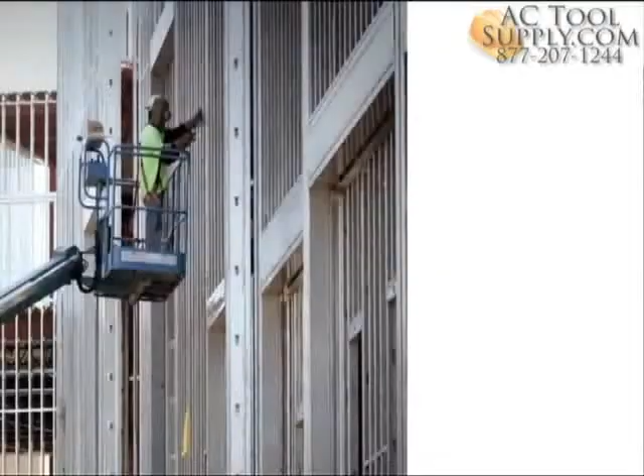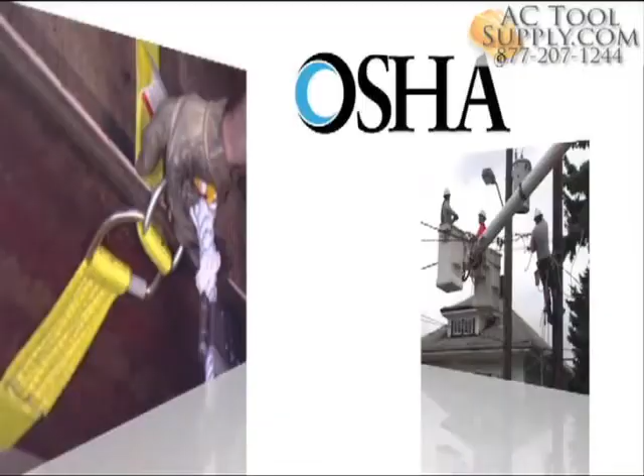Ensuring a safe workplace is a mandated employer responsibility. Under provisions of the Occupational Safety and Health Act, employers must provide workers with an environment free from safety and health hazards. In turn, manufacturing standards for fall protection equipment are established by the American National Standards Institute and the Canadian Standards Association and form the basis for OSHA safety regulations.

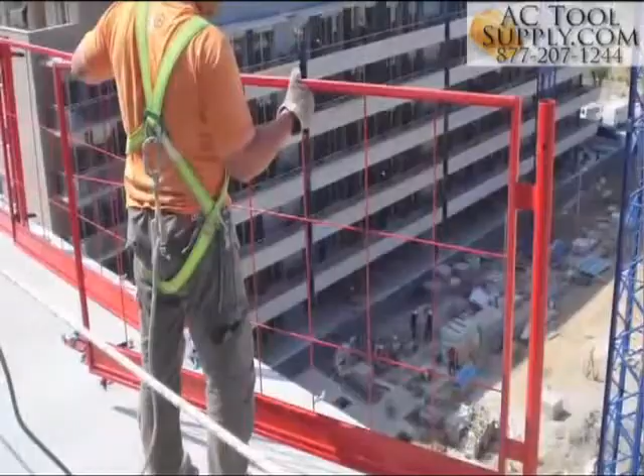Apart from compliance issues, however, the most effective fall protection programs result when employers work closely with workers to identify fall hazards present at a particular site and develop comprehensive safety at height plans and procedures. Even when fall protection measures are in place, it is important to recognize that equipment deteriorates over time, that routine inspection for wear and damage is critical, and that proper training in fall protection and equipment selection are absolutely vital.

A written fall protection safety plan should be created once the specific fall hazards have been identified. The plan should specify what fall prevention or personal protection measures are to be used, and it should also identify who is responsible for implementing the safety measures, including supervision and training. The program needs to be clearly conveyed and understood by all participants.

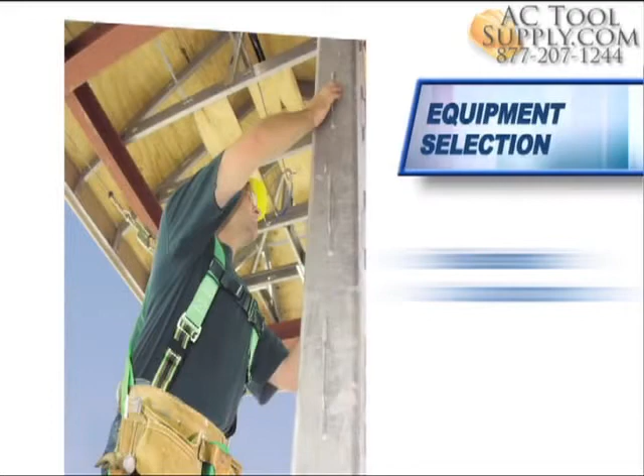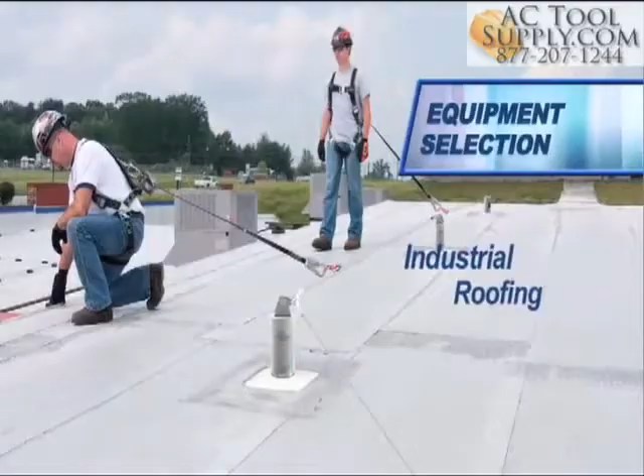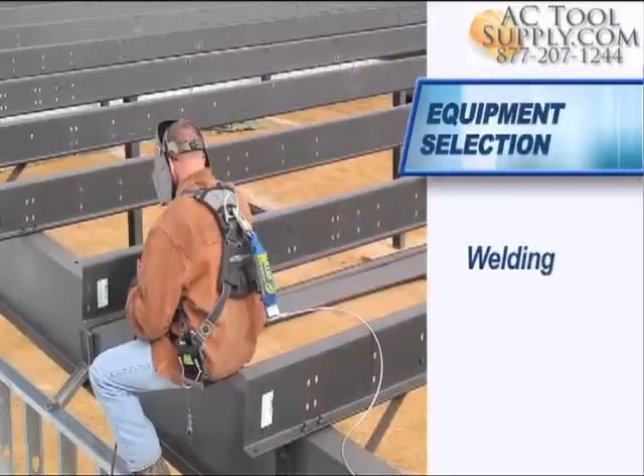Employers should be familiar with the different fall prevention equipment options available and select based on the particular site and type of work being performed. Consultation with safety equipment manufacturers is invaluable in identifying equipment that meets specific worker and job site variables. Because all work environments differ, it is impossible for the manufacturer to determine exactly which safety at height products will provide maximum protection for each job. By understanding how fall prevention and protection equipment operates and knowing the differences in product functions, the employer can select equipment that is best suited for its workers.

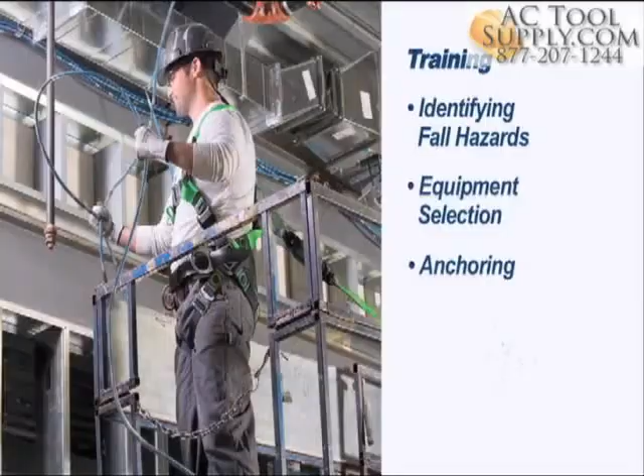Every worker must be trained in the proper use of appropriate fall prevention or personal protection equipment. Training should include identifying fall hazards, selecting appropriate equipment, following proper anchoring procedures, and using equipment properly. Workers should also learn how to inspect and maintain equipment.

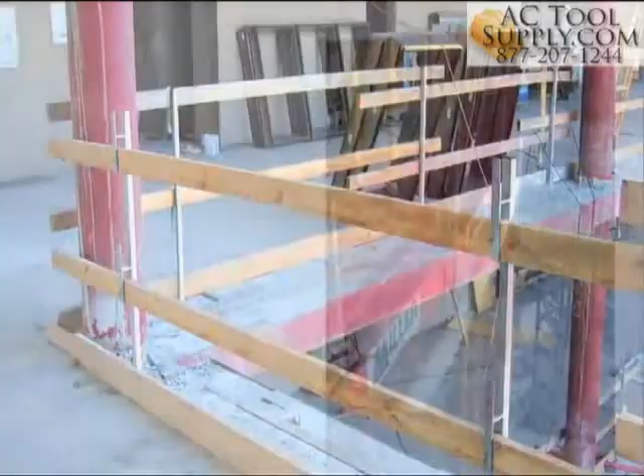Fall prevention, fall arrest, positioning and restraint, suspension and retrieval are the basic categories encompassing types of fall protection equipment. Fall prevention measures entail the installation of permanent or temporary barrier or guardrail systems that simultaneously protect multiple workers. This category of collective systems is typically used in building construction and other elevated areas where workers are exposed to leading edge decks, unprotected roof edges, elevator shafts, floor hatchways, chutes, or wall openings.

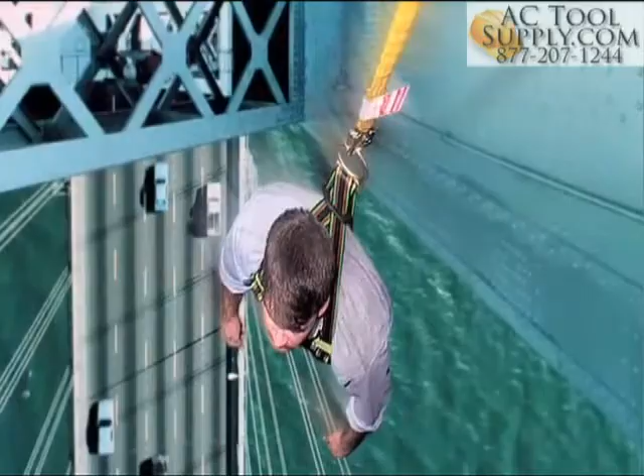Fall arrest equipment, or personal fall arrest systems, is comprised of three components that are often referred to as the ABCs of fall protection. These are anchorage connector, body wear, and connecting device. Used properly, a fall arrest system does not prevent a fall, but rather suspends a worker in the event of a fall and prevents impact with a lower obstruction or the ground.

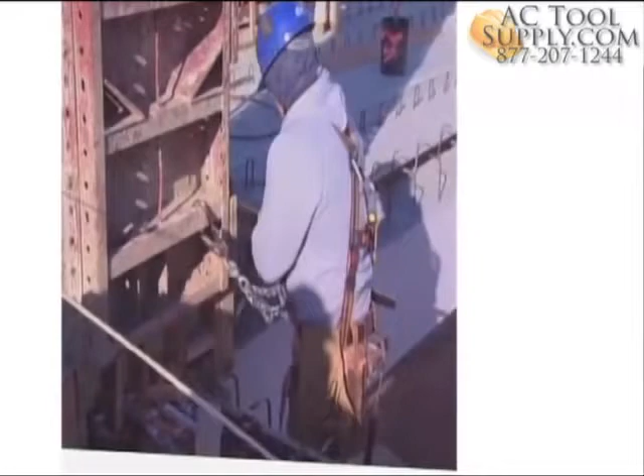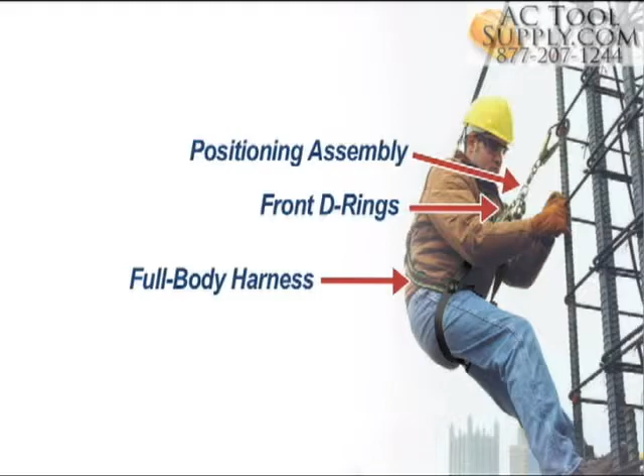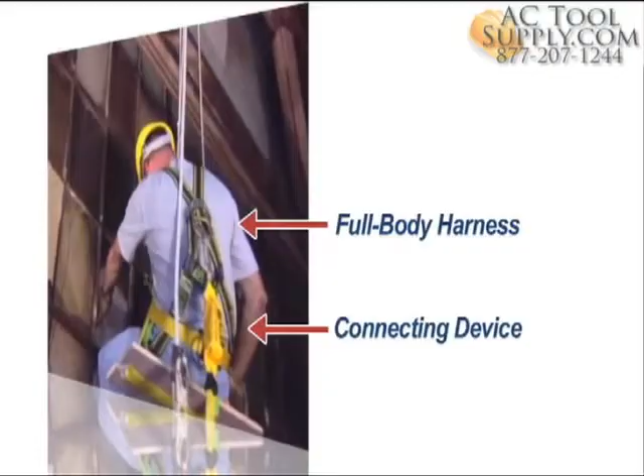Positioning and restraint systems hold a worker in place, allowing a hands-free workspace, or restrict a worker's movement in proximity to a fall hazard. A typical system consists of a full body harness with side or front D-rings, a positioning assembly, and an attachment point. Suspension systems enable workers to be lowered and supported to accomplish hands-free tasks such as building maintenance functions. Typical components include a full body harness, a connecting device or work line, a suspension device such as a chair or sling, and an attachment point.

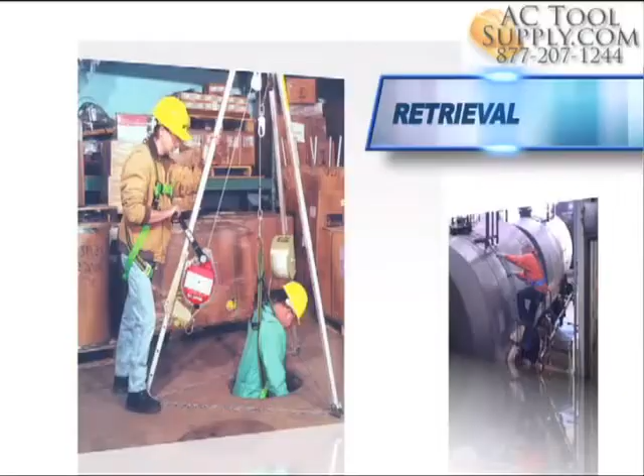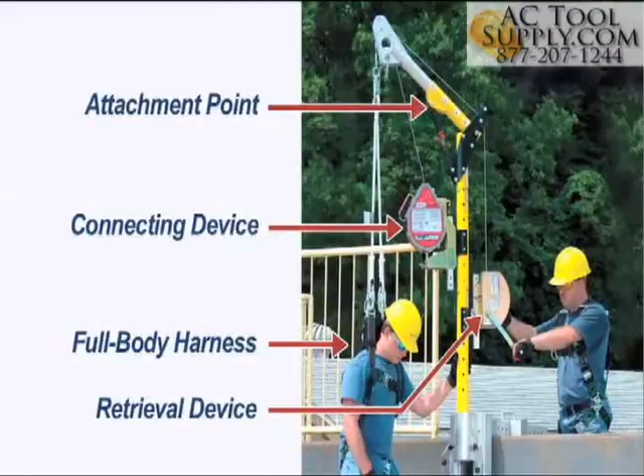Retrieval systems are used in storage tanks, manholes, and other confined space applications. The system includes a full body harness, a retrieval device, a connecting device, and an attachment point such as a tripod or Dura-hoist system. The three key components of the personal fall arrest system must be in place and properly used to provide maximum worker protection: anchorage connector, body wear, and connecting device.

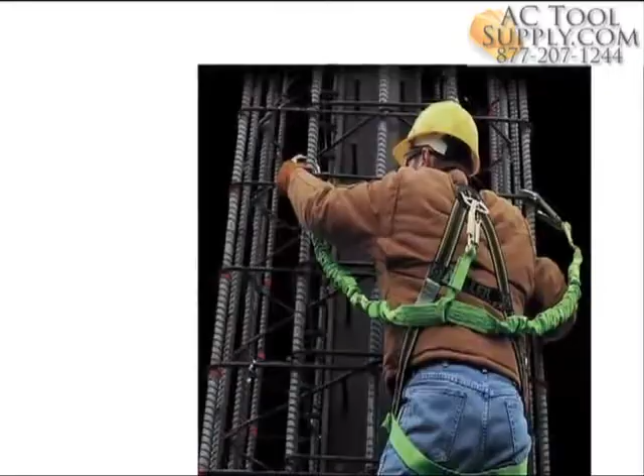An anchor point is a structural item such as an I-beam, scaffold, rebar, or lifeline to which workers are affixed when a fall hazard is present. It is sometimes referred to as a tie-off point. Anchor points must be carefully selected since their strength and stability are depended upon in case of a fall. To avoid a dangerous swing fall, workers should always try to connect and work directly underneath an anchorage point whenever possible.

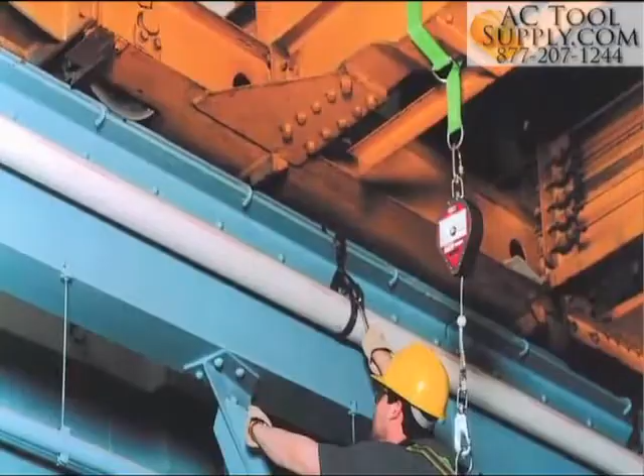An anchorage connector is an intermediary fall protection device, such as a cross-arm strap, D-bolt, or rope grab, that links the worker to the anchor point. Anchorage connectors are offered in a variety of configurations to accommodate vertical or horizontal connections for attachment to concrete substrates, large and small beams or scaffolding, rooftops, and structural steel. Some anchorage connectors are built into connecting devices. These tie-back anchorage connecting devices will be addressed in detail later.

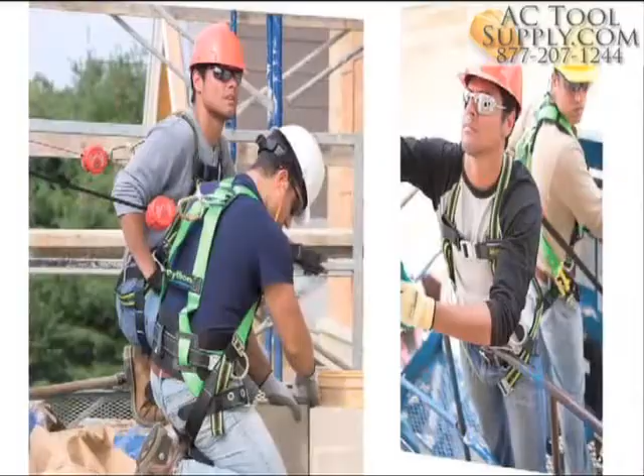The only form of body wear acceptable for fall arrest is the full body harness. The harness style should be selected based on the type of work being performed and the overall work environment. The full body harness offers an inherently high safety factor since fall forces are distributed throughout the body over many webbing components, including chest, shoulder, waist, and legs.

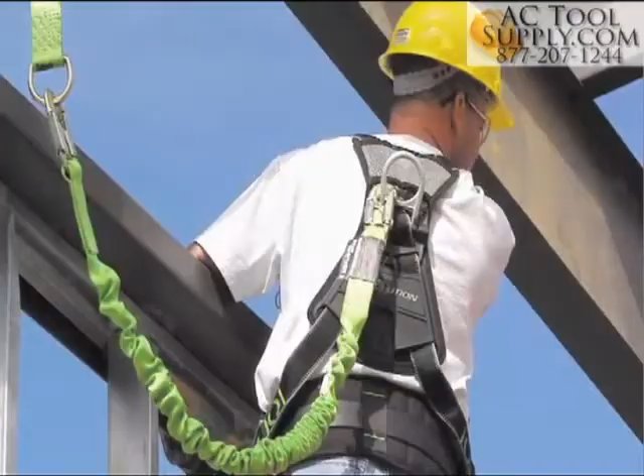In addition to distributing forces throughout the body, a properly fitted full body harness keeps the worker suspended upright while awaiting rescue. This is due to the sliding back D-ring, which slides along the webbing to the back of the neck once a fall occurs. OSHA states that potentially fatal suspension trauma can occur within minutes while waiting for rescue after a fall. Average fall rescue time is 15 minutes.

When used, the Miller Relief Step Safety Device provides support and enhances blood circulation until rescue, permitting the ability to move and flex leg muscles. Small and lightweight, the Relief Step Safety Device attaches to any brand of full body harness. Utilizing 2 Miller Relief Steps, one for each leg, assures greater comfort until rescue is completed.

While safety directors agree a comfortable harness fit is crucial to compliance, some workers lose sight of how important it is to follow directions when it comes to ensuring a snug fit with chest and leg strap adjustments and back D-ring positioning. In order to ensure proper protection, the full body harness must be worn properly. A simple 6-step guide can be followed that could save your life.

Hold the harness by the back D-ring and shake to allow any tangled straps to fall into place. Unbuckle chest, leg, and waist straps. If the harness has a belt, unbuckle it too. Slip the straps over the shoulders so the back D-ring is located in the middle of the back between the shoulder blades. Pull the end of one leg strap between the legs and secure to the opposite end. Repeat this step with the other leg.

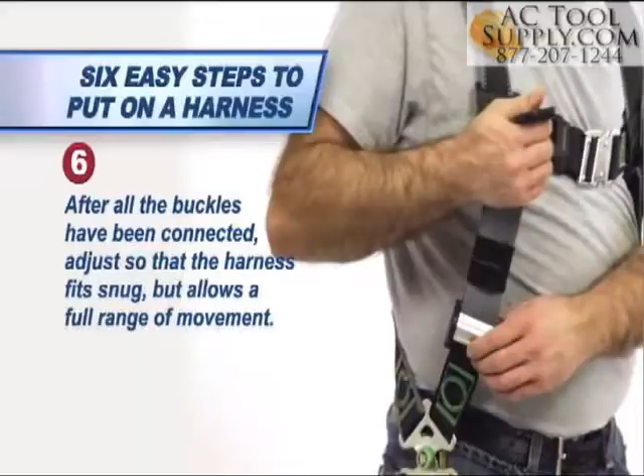If the harness has a belt, connect that after the leg straps. Connect the chest strap and position in the mid-chest area and then tighten shoulder straps. After all the buckles have been connected, adjust so that the harness fits snug but allows a full range of movement. Pass excess webbing under the loop keepers or web finials.

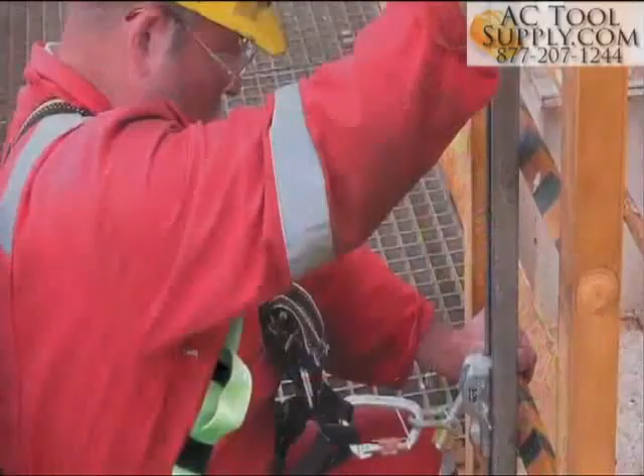Appropriate harness sizing influences compliance. Manufacturers offer various sizes as well as an array of styles for specific industries or activities. Side and front D-rings are typically used for positioning only. However, front D-rings or web loops can be used for ladder climbing and rescue.

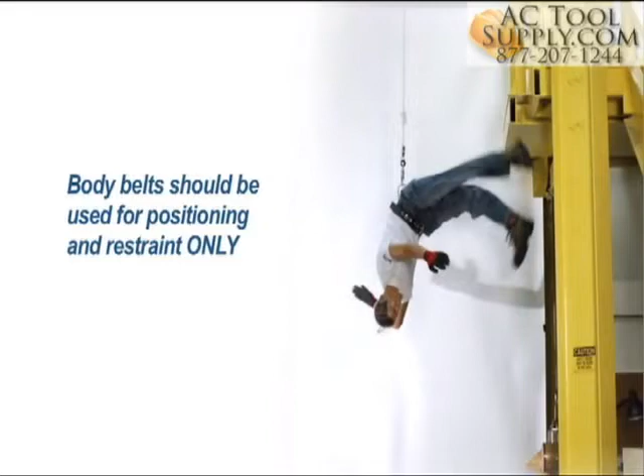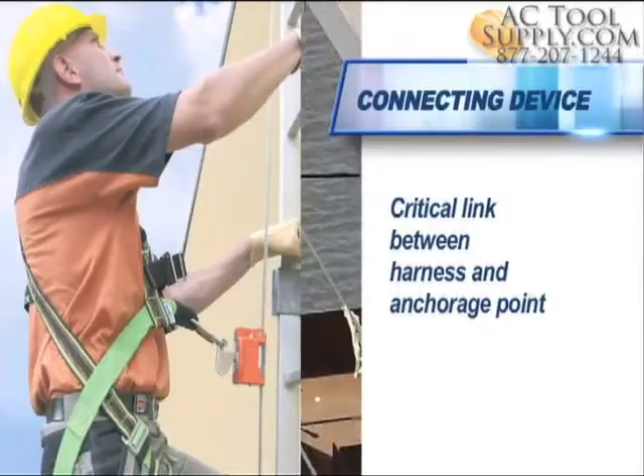Body belts should be used for positioning and restraint only. Most regulations prohibit their use for fall arrest. Body belts do not distribute fall forces, but concentrate arresting shock in the abdomen, resulting in serious internal injuries. A connecting device is the critical link between the harness and the anchorage point. The connecting device manages the greatest forces during a fall.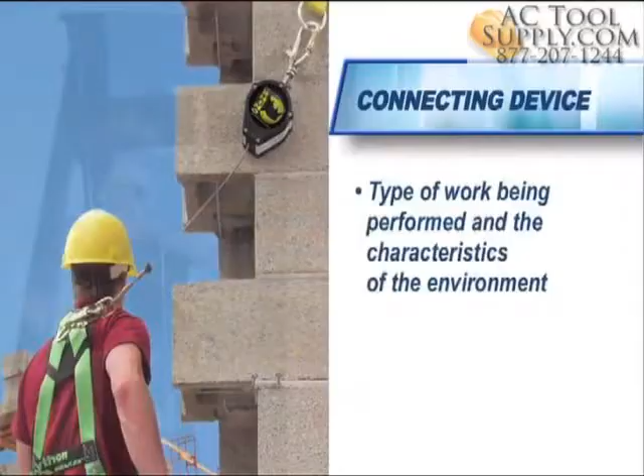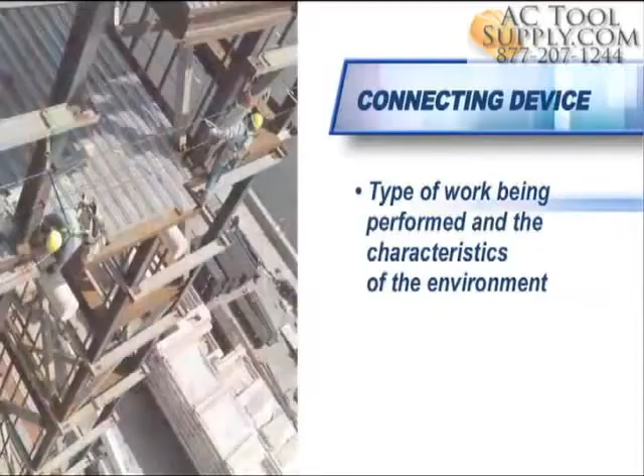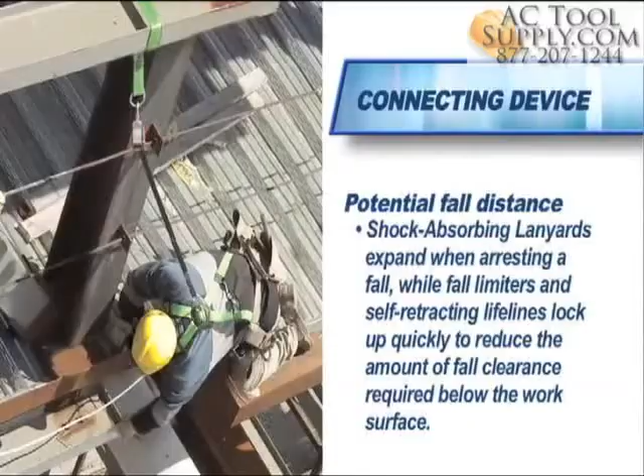Connecting devices should be selected according to these criteria: type of work being performed and the characteristics of the environment, such as the presence of moisture, dirt, oil, grease, and electric hazards, as well as the ambient temperature. Potential fall distance. Shock-absorbing lanyards expand when arresting a fall, while fall limiters and self-retracting lifelines lock up quickly to reduce the amount of fall clearance required below the work surface.

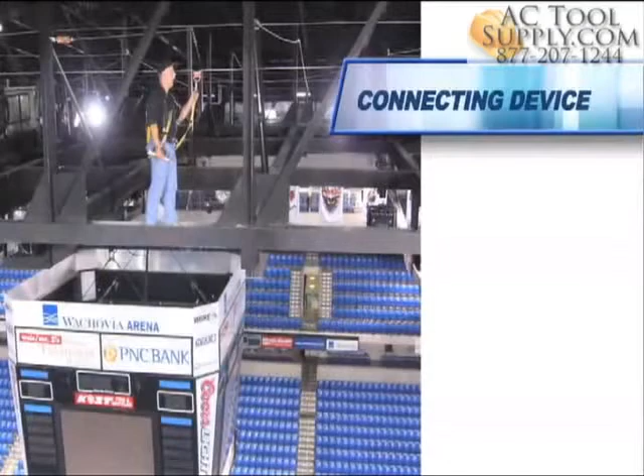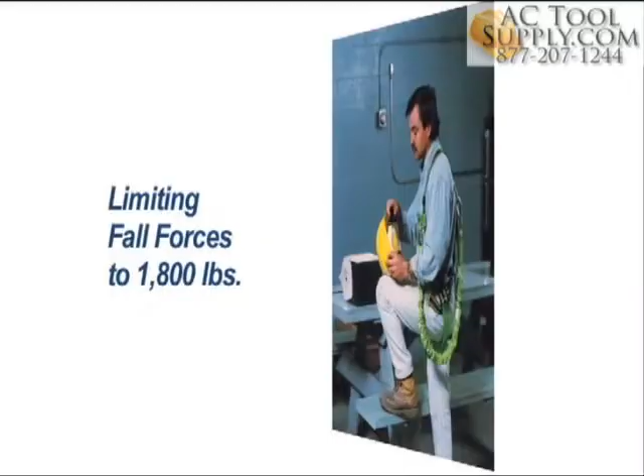A personal fall arrest system should be designed and tested as a complete system. Components produced by different manufacturers may not be interchangeable or compatible. Selection criteria should also include a close look at product quality. For example, OSHA regulations call for limiting fall forces on an individual wearing a full body harness to 1,800 pounds. Most reputable lanyard manufacturers state maximum arrest force on the label of the lanyard.

While OSHA regulations are the law and are enforced by a federal agency, ANSI standards are self-enforced by individual manufacturers. There is no enforcement body and no inspectors. The buyer cannot take stated performance per ANSI guidelines for granted. Always check with the manufacturer for documented proof. When attaching the connecting device to the harness, attach to the back D-ring only. If other D-rings are integrated on the harness, their use is for positioning or restraint.

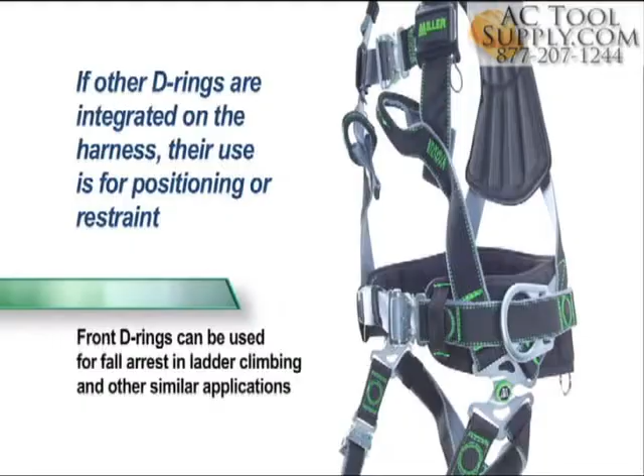Shock-absorbing lanyards are required for a fall arrest system. Non-shock absorbing lanyards are for positioning and restraint only. While both will arrest a fall, the maximum arresting forces when used together with a full body harness need to be less than 1,800 pounds. This is extremely difficult to achieve using a lanyard without a shock absorber.

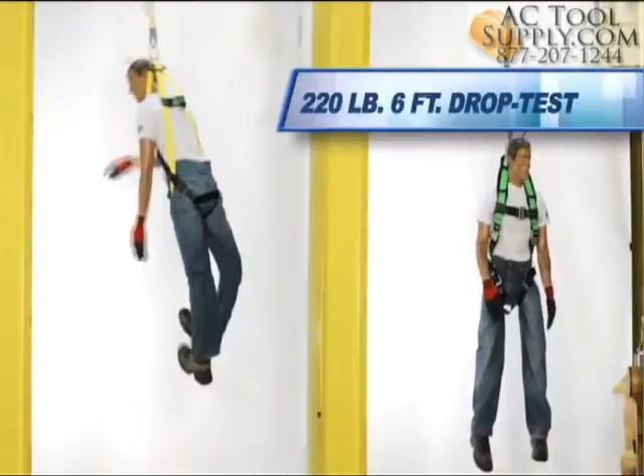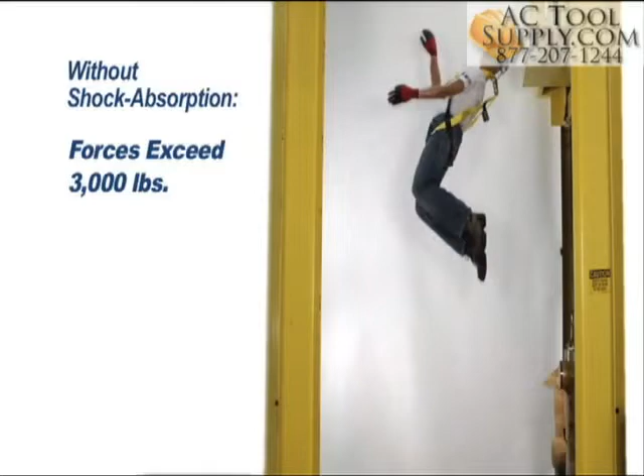A test fall of a 220-pound mannequin dropping 6 feet with and without a shock-absorbing lanyard demonstrates the forces on the body. Without shock absorption, forces exceed 3,000 pounds, causing the head to snap back and the body to bounce at the instant of arrest. With a shock-absorbing lanyard, deceleration is much smoother and more controlled, and fall forces are contained to 900 pounds.

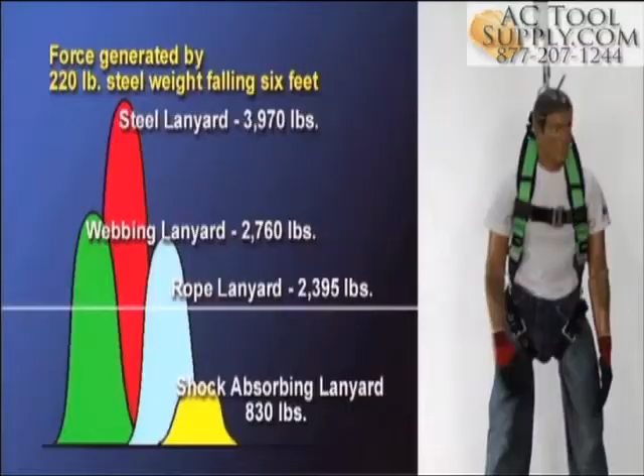Shock-absorbing lanyards feature pack or tubular designs, specially woven inner cores that smoothly expand to reduce fall arrest forces. Lanyards are available in steel, rope, and webbing. Never tie a knot in any web or rope lanyard. It reduces the strength by 50%.

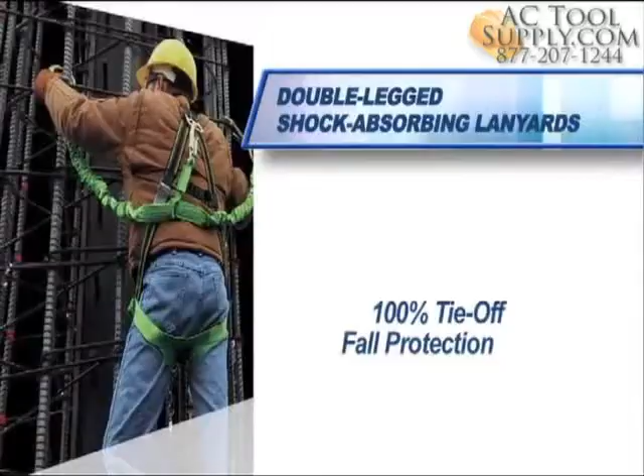Double-leg shock-absorbing lanyards provide 100% tie-off fall protection. If one leg is not used, it should be connected to a pull-free lanyard ring on the harness and never be attached to any permanent fixture on a harness such as a side D-ring. All Miller brand harnesses include pull-free lanyard rings, designed for storing a lanyard or extra lanyard leg when not in use.

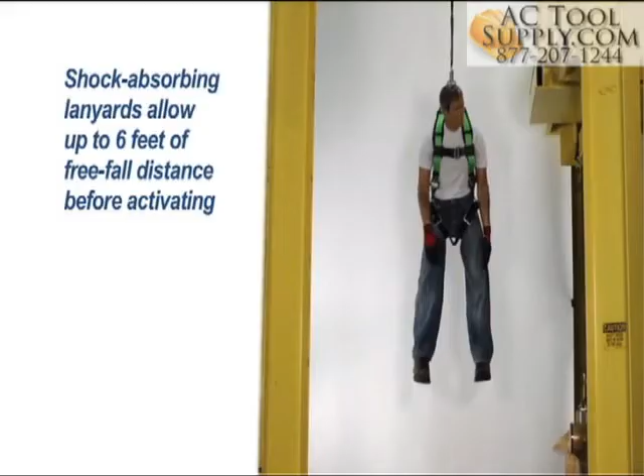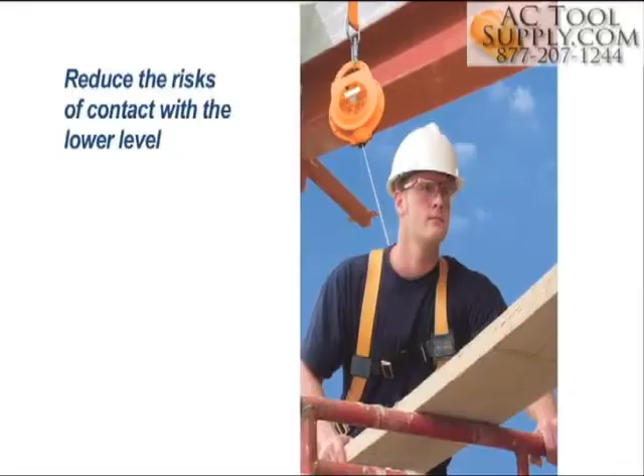Fall limiters and self-retracting lifelines, sometimes referred to as retractables, yo-yos, and seatbelts, are approved alternative connecting devices to shock-absorbing lanyards. While traditional shock-absorbing lanyards allow up to 6 feet of free fall distance before activating, self-retracting lifelines require less than 2 feet. Shorter activation and arrest distances reduce the risks of contact with the ground or lower level obstructions and allow for easier rescue in the event of a fall. Fall limiters and self-retracting lifelines are available with working lengths ranging from 6 to 175 feet.

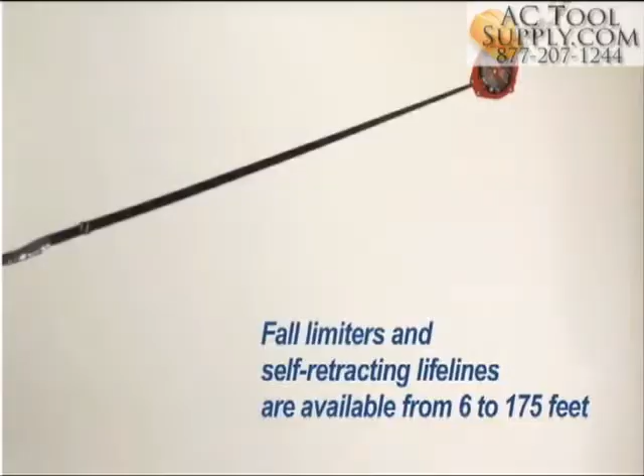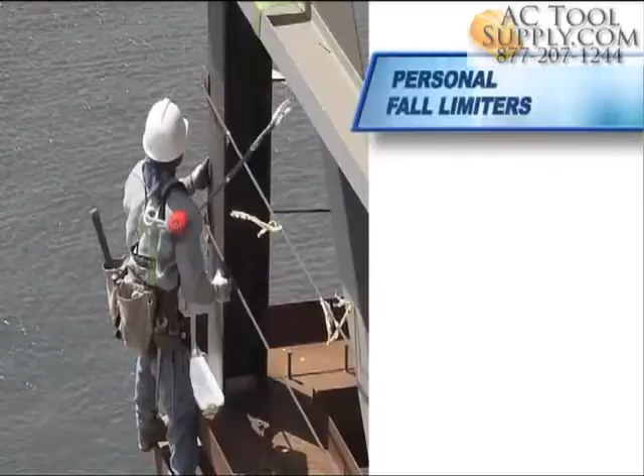Self-retracting lifelines are durable, heavy-duty devices that have webbing or cable wound on a brake drum that extends as the worker moves away from the anchor point and retracts as he nears the anchor point. Personal fall limiters are lightweight web connectors that require less fall clearance and offer optimal mobility while preventing tripping hazards. They may be attached directly to the back D-ring or used as a traditional retractable lifeline. Double leg units are also available for 100% tie-off fall protection.

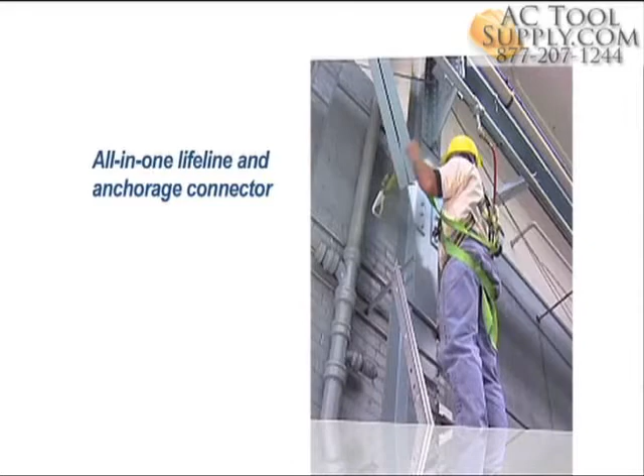Tie-back lanyards are a type of connecting device available as a lanyard or personal fall limiter that have a special snap hook and high-strength webbing that is designed to tie back anywhere along the lifeline. This all-in-one lifeline and anchorage connector increases safety and reduces equipment required on the job site. Only special snap hooks and webbing designed for use with tie-back lanyards are acceptable.

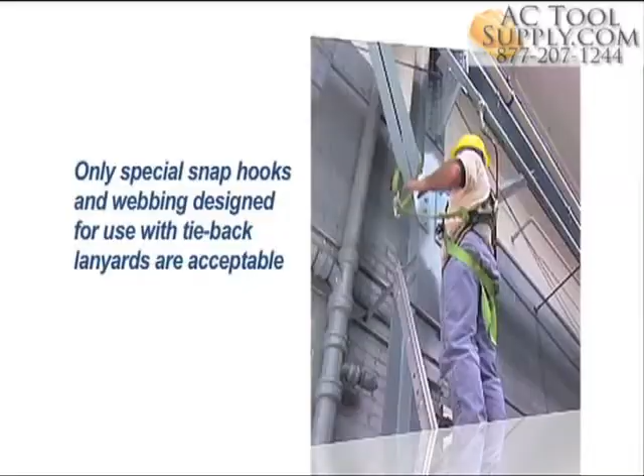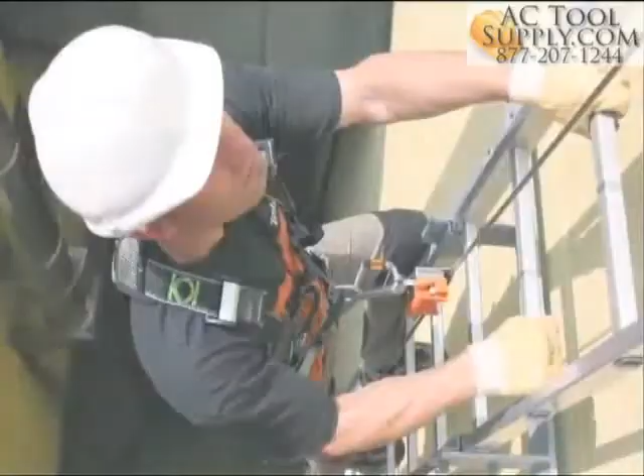Vertical lifelines are connecting devices available as rope or cable and used in conjunction with rope or cable grabs. These grabs are designed for hands-free operation, easily sliding up or down a lifeline as the worker moves, but instantly locking in place in the event of a fall. Common applications include roofing, window washing, and fixed ladder climbing. Connecting devices are the most critical components in surviving a fall and must be carefully chosen, properly used, and routinely inspected to ensure optimal performance and worker safety.

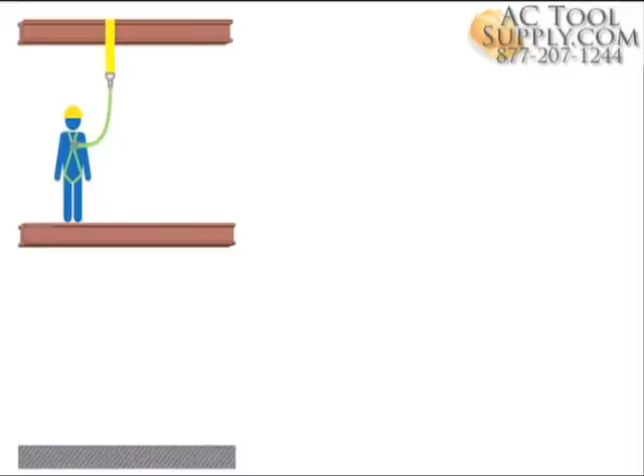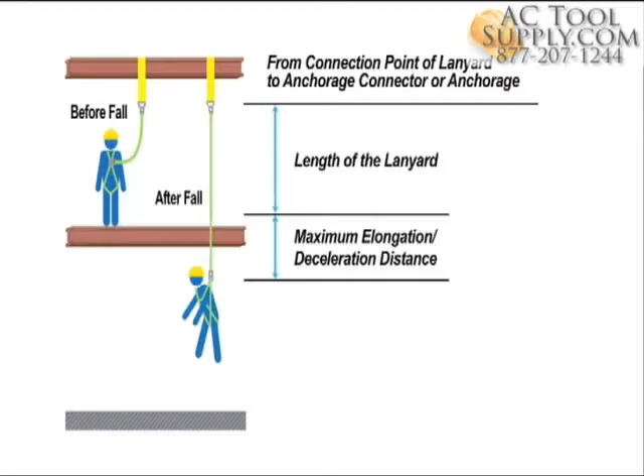Fall clearance calculations are vital in selecting proper anchorage points and connecting devices, and to avoid striking a lower level or obstruction in the event of a fall. Free fall distance should be limited to the shortest distance possible. This is never more than 6 feet when using a shock-absorbing lanyard, unless using equipment designed specifically for free falls over 6 feet. When calculating fall clearance required for a shock-absorbing lanyard, the following variables must be considered: the original length of the lanyard, the maximum elongation after shock absorber deployment, the height to the worker's back D-ring, and a safety factor of 3 feet.

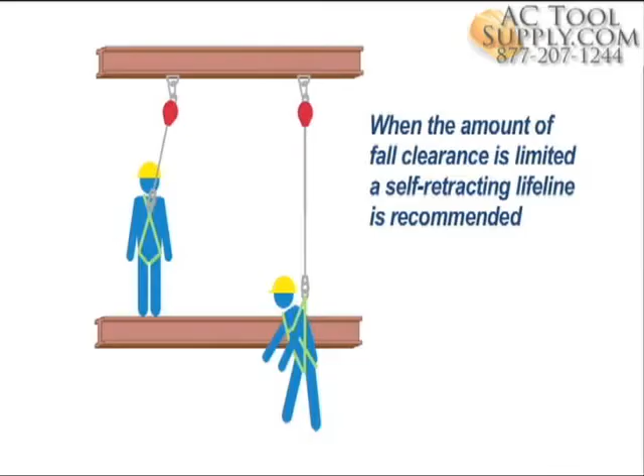When the amount of fall clearance is limited, a self-retracting lifeline is recommended. Some retractables require as little as 5 feet of fall clearance from the work surface to the next lower level or obstruction. While fall clearance is calculated from the anchorage point for a shock-absorbing lanyard, fall clearance for a self-retracting lifeline is often calculated from the work level. When calculating fall clearance for a self-retracting lifeline from the work level, the following must be considered: maximum fall arrest distance and a safety factor of 3 feet. Always know your fall clearance when selecting your connecting device.

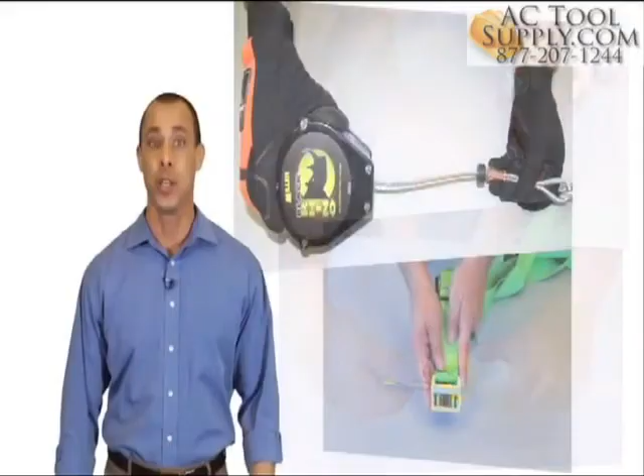To maintain service life and high performance, each harness and connecting device should be visually inspected before each use and regularly inspected by a competent person as defined by OSHA. Following these instructions may still necessitate removing the harness or connecting device from service prior to the expiration of the 5-year life expectancy guideline. Likewise, proper adherence to the inspection and maintenance criteria may extend the useful life beyond 5 years. Ultimately, it is the responsibility of the end user to determine when a harness or connecting device is unfit for use and should be removed from service. When not in use, products should always be stored at room temperature, away from chemicals, moisture, and ultraviolet light.

To maintain proper service life and high-performance fall protection equipment, anchorage connectors, body wear, and connecting devices must be inspected regularly. Grasp the harness webbing with hands 6 to 8 inches apart. Bend the webbing in an inverted U as shown. Surface tension on the webbing will reveal damaged fibers or cuts. Follow this procedure for the entire length of the webbing on both sides, looking for frayed edges, broken fibers, pulled stitches, cuts, burns, or chemical damage.

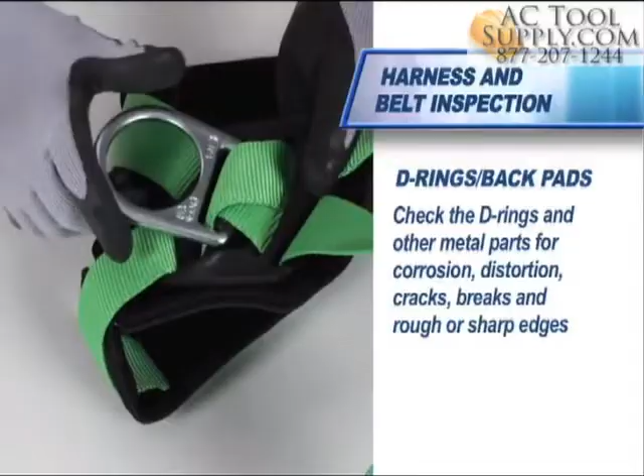Check the D-rings and other metal parts for corrosion, distortion, cracks, breaks, and rough or sharp edges. The D-ring should pivot freely. Inspect for any unusual wear, frayed or cut fibers, or broken stitching of the D-ring attachments. Pads should also be inspected for cracks, excessive wear, or other signs of damage. Inspect buckles for unusual wear or distortion, fibers around buckle attachments, or distortion.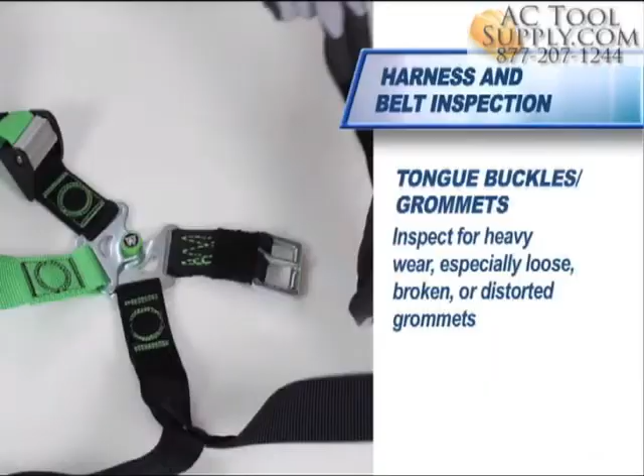Mating and friction buckles should not be bent or distorted. The outer and center bars must be straight. Tongue buckles should be inspected for heavy wear, especially loose, broken, or distorted grommets. Webbing should not have additional punched holes. The tongue should overlap the buckle frame and move freely.

Quick connect buckles must be free of debris and engage properly. The outer and center bars must be straight. Inspect fall arrest indicators located on the back D-ring pad for signs of activation. Remove from service if broken or stretched between any of the pairs of arrows.

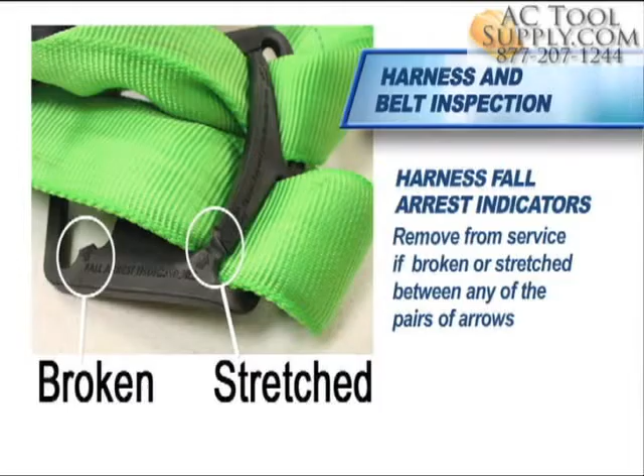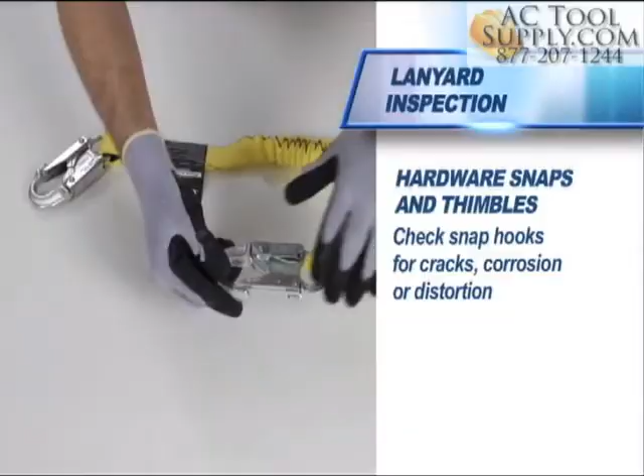When inspecting lanyards, work from one end to the other using a slow rotation. Check snap hooks for cracks, corrosion, or distortion. Keeper springs must have sufficient force to close firmly. The snap hook locking mechanism should keep the hook's gate securely locked.

Thimbles must be firmly seated in the eye of the splice, not displaying any loose or cut strands. There should be no sharp edges, distortion, or cracks around the edges of the thimble. Always wear gloves when inspecting a wire rope lanyard. While rotating, watch for cuts, frayed areas, or unusual wearing patterns on the wire.

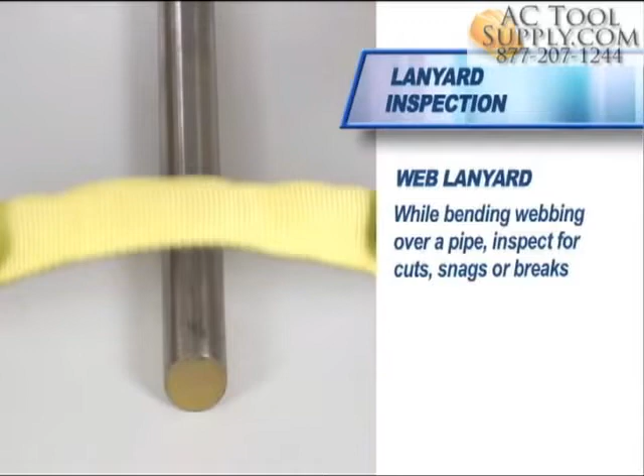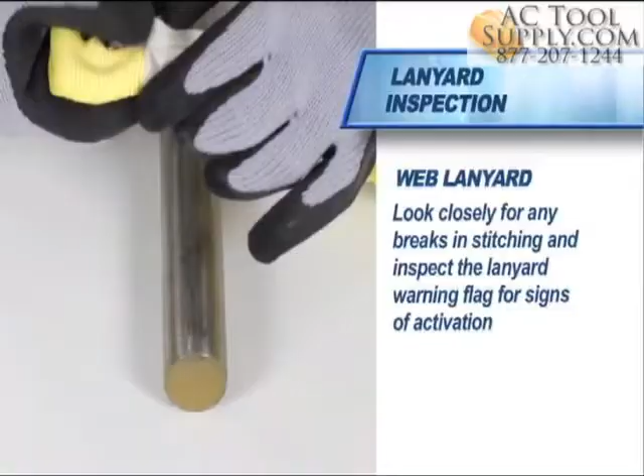While bending webbing over a pipe, inspect for cuts, snags, or breaks. Swelling, discoloration, cracks, and charring are obvious signs of chemical or heat damage. Look closely for any breaks in stitching and inspect the lanyard warning flag for signs of activation.

When inspecting a rope lanyard, rotate the entire length while looking for fuzzy, worn, broken, or cut fibers. Diameter of the rope must be uniform. Outer portions of the pack should be examined for burn holes and tears. Stitching at attachment points must be free from loose strands, rips, deterioration, or other signs of activation.

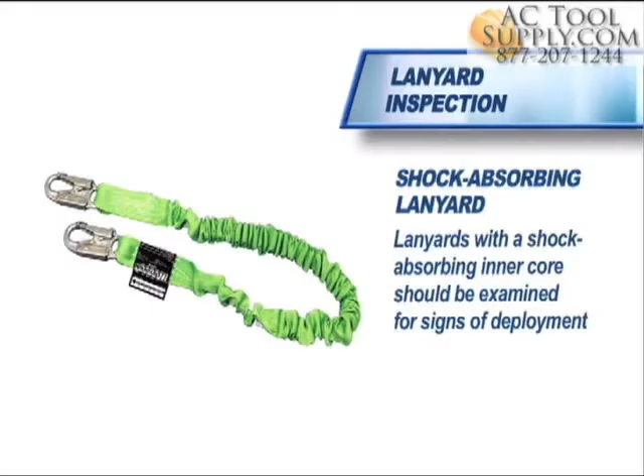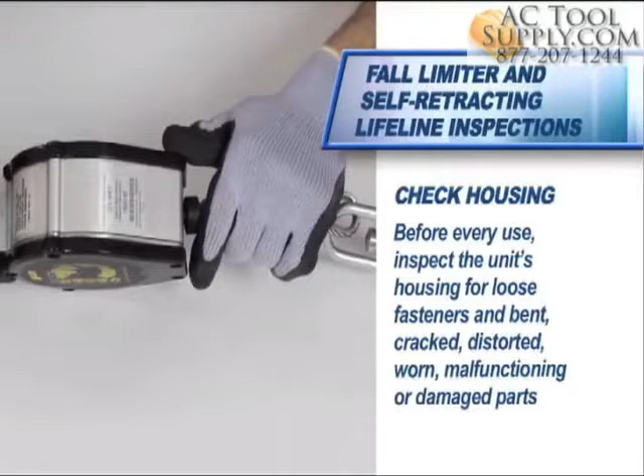Lanyards with a shock-absorbing inner core should be examined for signs of deployment. A warning flag will indicate if the product has been used to arrest a fall. If the flag has been activated, it must be removed from service. Before every use, inspect the unit's housing for loose fasteners and bent, cracked, distorted, worn, malfunctioning, or damaged parts.

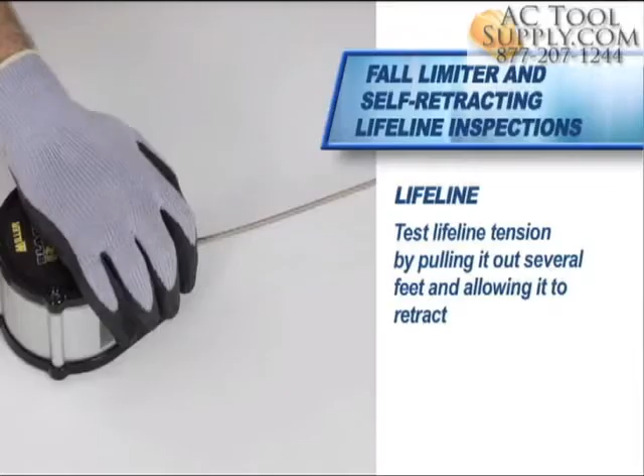Test lifeline tension by pulling it out several feet and allowing it to retract. The lifeline should pull out freely and retract all the way back into the unit. Do not use the unit if the lifeline does not retract. The lifeline must be checked regularly for cuts, burns, corrosion, kinks, frays, or other signs of wear.

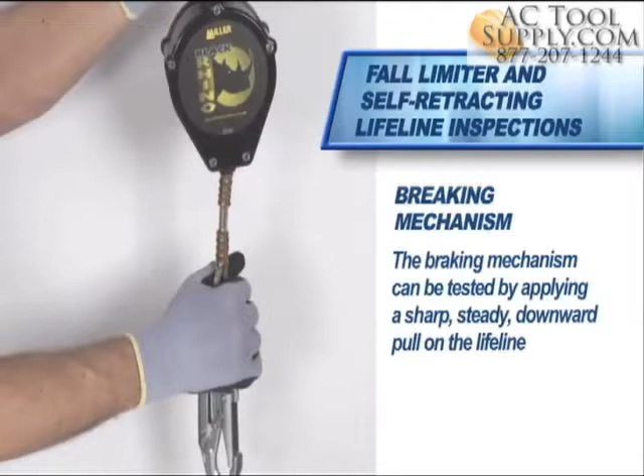The braking mechanism can be tested by applying a sharp, steady downward pull on the lifeline. There should be no slippage, and when tension is released, the brake should disengage and the lifeline should retract into the housing. Do not use the unit if the brakes do not engage.

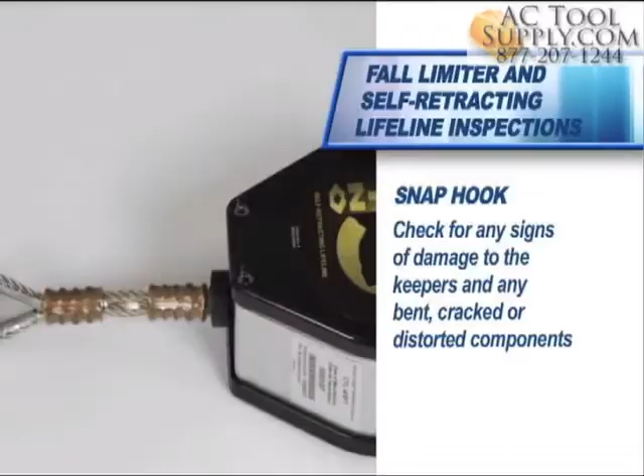Make sure the snap hook locks and the swivel operates smoothly. Check for any signs of damage to the keepers and any bent, cracked, or distorted components. Make sure the carabiner is properly seated and in the lock position between the attachment point on the device and the anchor point.

Each year, hundreds of thousands of injuries and deaths are attributed to work-related falls. The good news is that with the proper fall protection equipment and training, these tragedies can be prevented. Fall prevention in the workplace begins with a commitment to safety. Both management and employees must be thoroughly committed for a fall protection plan to be effective.

Understand all applicable OSHA regulations and ANSI and CSA standards regarding fall protection before using equipment. Take the time to ensure your workplace is a safe place. Identify possible fall hazards. Be committed to safety. Develop a fall protection plan and provide proper training. Fall protection equipment should be used only after proper training from a competent person.

Employers should provide training for prompt rescue should a fall occur. Rescue procedures should be reviewed as a part of the company's regular safety training program. Read all instructions and warnings contained on safety products and in the packaging before using any fall protection equipment. All fall protection equipment should be carefully inspected before each use. If any damage is detected, the equipment should be removed from service.

Attach in a manner which will limit a free fall to the shortest possible distance and make sure there is adequate fall clearance in the event of a fall. Use only the back D-ring on a full body harness for fall arrest. Other D-rings are for positioning and restraint only.